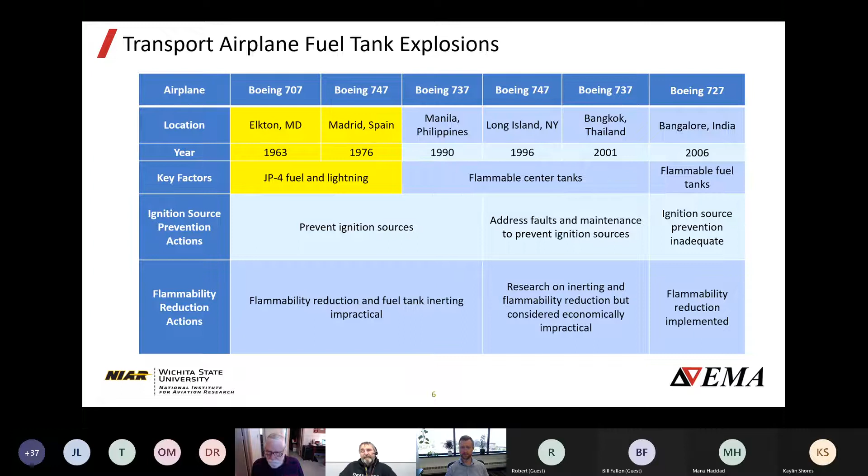So as a result of this, at the time, I was the chairman of the National Lightning Committee for the SAE AE-2, and we have a task group that is currently writing a document called ARP 6205. Now, as part of that research that was being done and to try to help industry, we came up with what we call a KART program.

Now, everyone always asks, what is KART? Well, in the state of Kansas, Wichita, Kansas is considered to be an aviation cluster. In other words, we have a lot of industries right around this area: Boeing, Airbus, Cessna, Textron, Beech, a lot of aircraft companies, and therefore a lot of support for those aircraft companies in Wichita. And Kansas is considered to be an aviation cluster.

Well, the state of Kansas helps support these companies, and they do that through a program known as KART, Kansas Aviation Research and Technology Growth. So every year, the taxpayers of Kansas provide these companies with seed money, which they must match and increase to develop programs to advance safety and to do research into various issues of aviation.

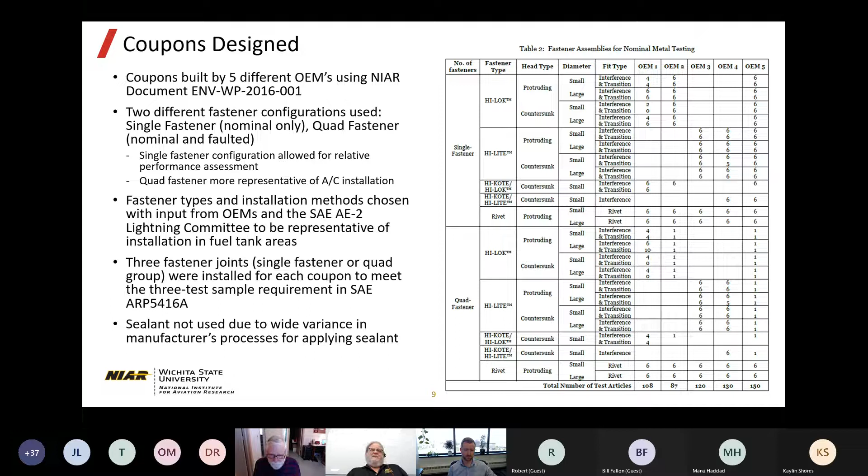The ones with the 4 fasteners, it was chosen that we would only have one of those have a fault installed because that was more representative of what you'd expect on an aircraft. It was low probability that you'd have a cluster of faulted rivets on an airplane, so we thought that was more representative.

A gap under the head is where, to facilitate that, shims were used in installation and then removed after installation, so you would get a characteristic gap under the head. The gap under the collar was similar, done with shims at installation to simulate that kind of fault. A scratch is a certain size, 5 thou wide, 5 thou deep, and 1/2 inch long scratch in the aluminum surface of the coupon underneath the fastener.

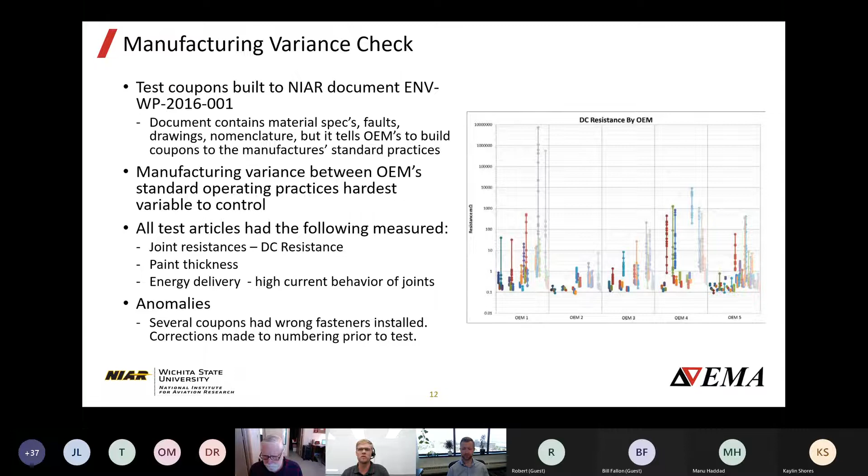So testing approach, we use the methods from SAE ARP 5416 and the waveforms from ARP 5412. This was basically a conducted current test using the component A 6.4 by 69 waveform. For our single fastener installs, which were the nominal installations, we typically started in the 5 to 10 kiloamp range. For the quad fasteners, those take quite a bit more current, so we had to go all the way up to about 100 kiloamps on that. Component B and C are direct effects waveform components. C is kind of like a continuing current component, and it's difficult to apply that in a scaled fashion.

So what we did for those two is we took the charge transfer from the scaled B and C and basically put that together as a lumped parameter and applied it as an exponential waveform. And that was basically scaled up and down. So it was only two waveforms applied. We applied those simultaneously, the A and the BC component. We use the camera method for everything. So basically what we do there is we take a digital camera and we use a camera verification to ensure that that digital camera can capture the light from a 200 microjoule spark.

200 microjoules is the minimum ignition energy for all the different components that make up typical aviation fuel. That's the standard for ignition source testing. You can either do it with a camera source or you can use that 200 microjoule source to calibrate a substitute ignitable mixture, like a hexane mixture or an ethylene mixture. In this case, the camera method is a little bit easier, especially since we're dealing with the same kind of coupon, same coupon size, fixed distance from the camera.

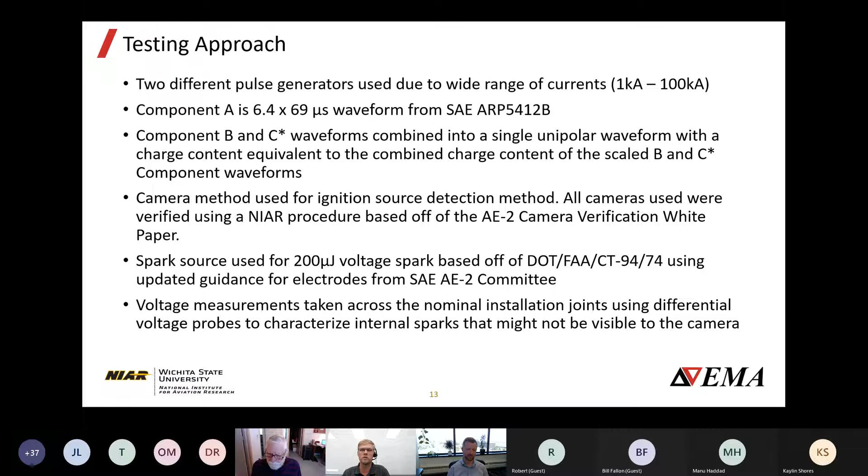The next slide, please.

So what we're looking for on these is, for the nominal fasteners, the minimum sparking threshold. So we want to find the minimum current value at which the nominal installation does not spark. So you have an installation guide. And then for the faulted fasteners, it's the maximum non-sparking threshold. For some of the fastener installations, we were able to go up to about 100 kiloamps, and that's more than enough, and that's where we drew the line. If it's past that, it's probably a pretty good installation.

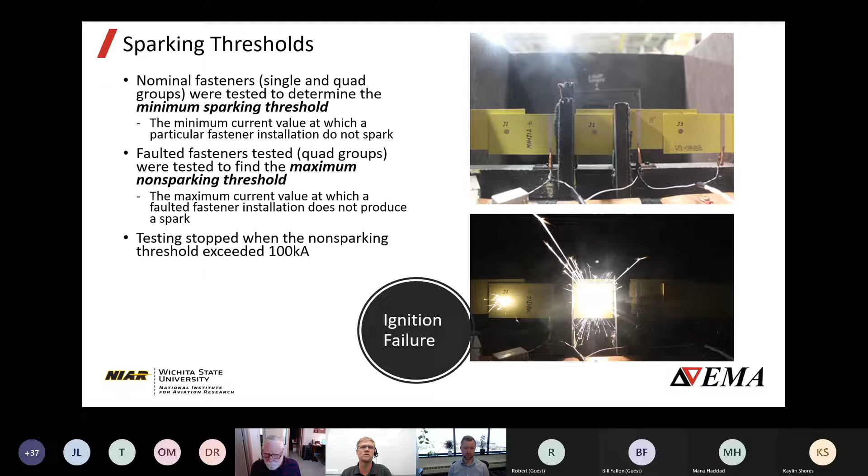So what we found: the majority of the sparks came from fasteners with non-conductive coating. Not surprisingly, riveted fasteners performed a lot better. Riveting causes the metal to expand and make contact with the edge, and if you don't have a gap and you've got good surface contact all the way around, no spark. Pre-test bonding resistance measurements had no correlation with sparking performance. So a key finding of this, and this should be known, is 2.5 milliohms is not a design target.

We did have some issues with the manufacturing anomalies that we discussed earlier. Had a couple oversized and elongated holes. We had a hole size that was too small for what the transition fastener fit was. Like I mentioned earlier, we were able to dissect all these coupons, and we did not allow any of the anomalies to skew our results. In some cases where we had wrong fastener installs or something like that, we could shift those results to another category. So we just had less data samples in one set and more data samples in another set.

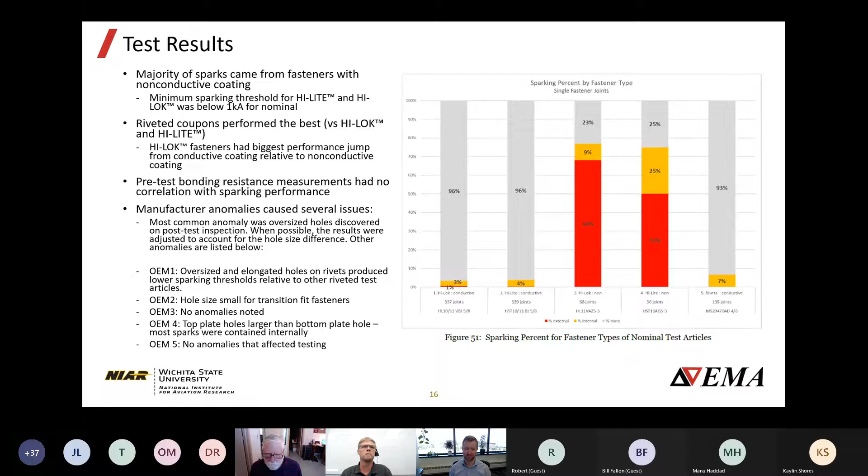Part of what we were looking for on this was to determine what factors had a great effect. As I mentioned earlier, obviously riveted fasteners provide the best performance. Fastener head type did not matter. The diameter of the fastener, surprisingly enough, did not produce significant results. The fit type, transition fit, caused more internal sparking, but minimal correlation to external sparking. The coating was a big driver. That was the most statistically significant driver in the reduction of sparking, using a conductive coating versus a non-conductive coating. Looking at the fault types, the burr and the gap under collar caused the most sparking relative to the rest of the fault types.

Obviously, more fasteners means you've got a better current distribution across the fasteners and less risk of sparking. And one of the also interesting findings of this is for our controlled manufacturing variance, which we can trace back to the manufacturers building the same coupons with their own processes, that did not impact the spark threshold, which is good news. The anomalies did cause some sparking. Most of it was internal, which would not be an ignition source by the test, but it is kind of worrisome from a design perspective.

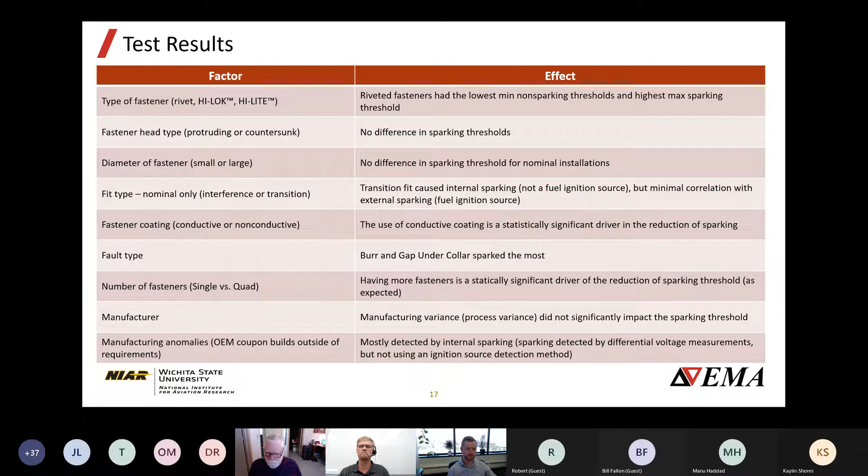And I believe that's the end of my slides, so thank you. All right. Thanks, Brock. So for the, Brock, can you mute your? Yes, working on that. A little bit of an echo. All right, that's great, thanks.

So the next part that I'll talk about, Billy mentioned in the opening that there's a simulation phase associated with this project. And the reason that we do simulation is part of the fuel system environment definition. And so what you have to do is you have to establish the current level, the amplitude and the waveform that could exist at every design interface within your fuel system that you will have to evaluate if ignition will occur or not. And this can be a major step in the 954 certification process.

And you have to do a grouping of your components based on fastener type, diameters, locations, whatever it might be, so that you can put these design features together in a way that you don't have to understand every current at every fastener within your fuel system. That's not practical to do. So the way you group these features together can matter a lot. And it can really help to reduce the number of measurement locations or simulation probe locations that you have to establish during your environment definition.

And within the guidance material 6205 that we're writing right now, that is very nearly finished, you can specify your lightning environment for your fuel system by testing, analysis, or similarity, or of course, some combination of those. And with discussions with NIAR and other programs that we've worked on for 981 and 954, really, we feel the best solution for setting your lightning environment is a combination of testing and simulation used harmoniously. And I'll talk about what that means and the selected demonstration approach for the KART project here.

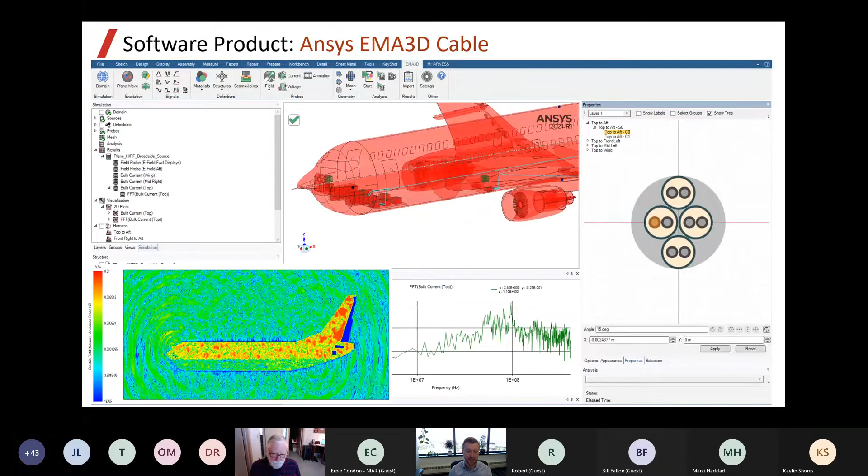For all of this analysis, we use our internally developed product, EMA3D Cable. It is a very mature software platform. It's well suited for lightning, HIRF, EMI, EMC interaction problems on aerospace vehicles. We have the ability to model full vehicles. We have the ability to model very fine details focused on small fuel system interfaces. We have the ability to model complex cable harnesses at the same time as our full aircraft. We have a transmission line solver integrated with our full wave 3D solver. And this is what we use for this analysis.

So when doing the lightning environment definition process, there are some key steps. First off, you have to establish a validation plan. What model and what test specimen do you have available to do analysis on? Do you have an entire aircraft that you're going to use for your environment specification? Do you have sub-assemblies of fuel system components? Do you have a wing that's available to do this assessment?

And as Billy mentioned, there was an aircraft that was donated and we were able to use as part of this evaluation for this KART program. And we took half of one side of the wing and we used it for resistance measurement, and we used the other side for a full wing lightning injection evaluation. And that's what's shown here, the one side of the wing that we rigged with an RCS and outfitted with probes so that we could do current measurements throughout the wing structures of this particular wing. An important thing to mention is that this aircraft had the fuel systems removed, and that would certainly be an important part of the process.

But since the KART program was focused on fastener interfaces for mostly structural components, we thought it was a good representation of what we were after as part of this program here. So once you have defined your aircraft specimen and the model that you will be using for your environment definition, you have to have some way of representing that geometry within your simulation.

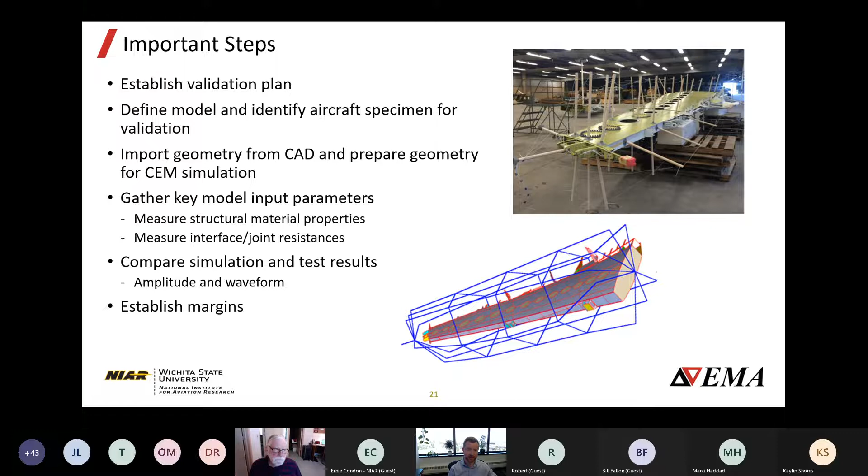And once you have built your model and performed simulations according to your attached-detached scenarios that are appropriate, you have to be able to compare your simulation and test results together. And that's both in terms of amplitude and waveform. And so once you have done all that, there's always the touchy subject of establishing margins. So I'll talk about each of these a little bit more that we utilized for this program.

So for the resistance measurements, what we did is, well, I shouldn't say, I didn't do this at all. I just kind of said, let's make some key measurements at these interface locations between ribs and skins, ribs and spars, skins and spars, and basically every structural type of representation we had within the wing. The NIAR folks did a great job of cutting samples from that opposite wing and then performing resistance measurements to gather inputs to improve the fidelity of the simulation model.

Now, Brock, one of his key points that he mentioned for establishing sparking thresholds was that the pre-test resistance had no correlation to occurrence of ignition event. But I can tell you for sure that the resistance does impact the current distribution. So whether or not it results in an ignition event, we can't say, and resistance may not strongly correlate to that, but it does have a big impact on the amplitude and wave shape of current distribution throughout the wing.

So it's very important to understand what kind of resistances and interfaces might exist within your fuel system when doing analysis. And so we collected a lot of data using these coupon samples at these primary structural interfaces and used those directly as inputs for our simulation model. And a lot of time was spent understanding the ranges and some sensitivity associated with those resistance values.

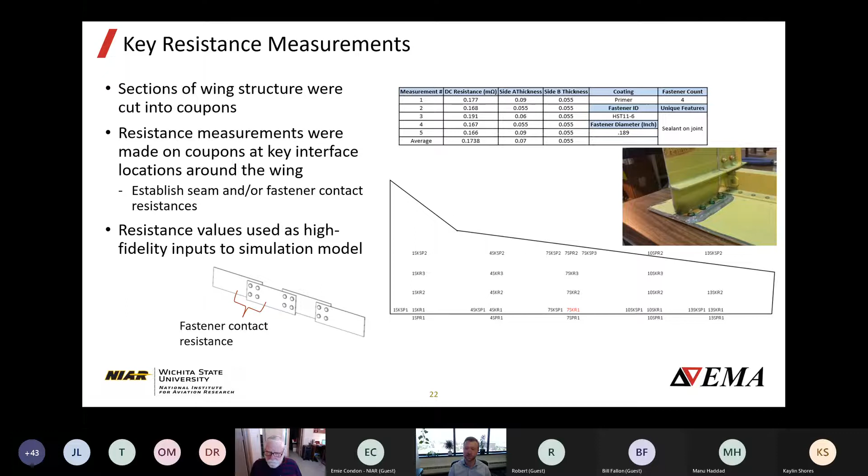For the actual testing, we created a test plan that utilized the entire wing. We measured magnetic fields with B-dot probes, both exterior and interior for structures. And then also we looked at currents on detach braids, main attached brackets, and an interior wire that we added that would be somewhat representative of the resistance of a fuel pipe or a hydraulic pipe inside the wing. So we had a test matrix that we looked at.

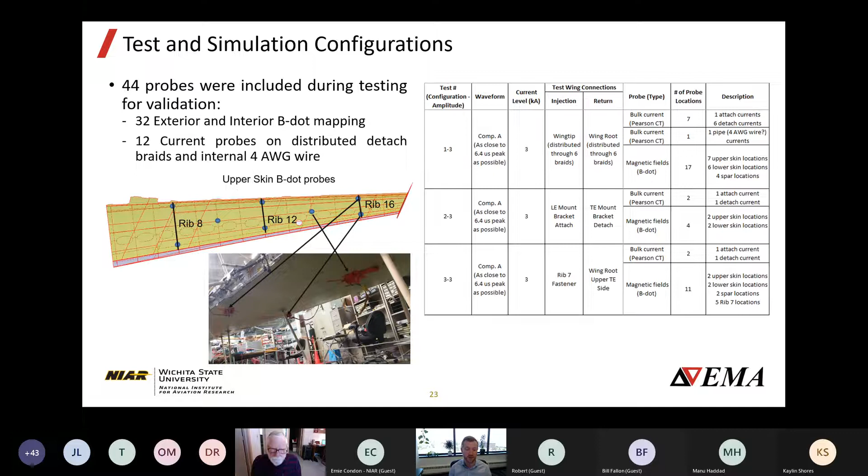One of the scenarios was a wingtip attachment and a root detachment or current exit. We also had a case where we did a fastener injection that would be representative of a 2A attachment zone. And we also did an attachment to one of the brackets on the leading edge and conducted current across the wing. For this particular wing, there's no engine mounted on the wing, but there are certainly scenarios where the engine design is such that it's mounted on the wing. And so we wanted to conduct current across one of the ribs for that particular type of design.

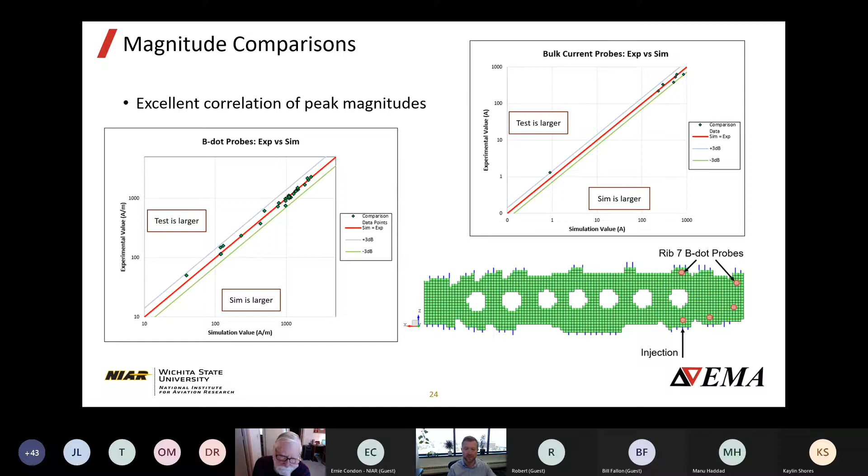And I say we were looking only at structural currents for this evaluation because that's all we had available within this particular test specimen. But it correlated well to the goal of this program, looking at structural interfaces with fastened joints. Here's some samples of the waveforms.

And so this is looking at magnetic fields outside on the wing, magnetic fields measured along ribs at interfaces between skin and spar or rib and skin, and then also some interior current locations. And so we have 44 different plots like this.

And if you're going through your certification program for 25.954, certainly you will be asked about peak magnitude establishment for your environment. And if you're doing a validation, that's a correlation between simulation and experiment like we showed on the previous slide. But you'll also be asked about the waveform. And that has to do with the action integral or energy content associated with the current flowing through a particular area. And there's different beliefs and philosophies about how you would do a validation or establish that particular level.

There's good information in ARP 5415B that talks about waveform reduction and how you should consider the different waveforms and do that evaluation. So I refer you to that for a deeper explanation. But what we're seeing in all of these results is a very close correlation between the test and simulation, both for amplitude and the general shape of when the peak time occurs and what the T2 is like for it.

Now, not all of the test results here have T2s. We didn't have the time to go back and do additional testing to carry them out for a long duration, but everything that we were able to acquire had a very good correlation.

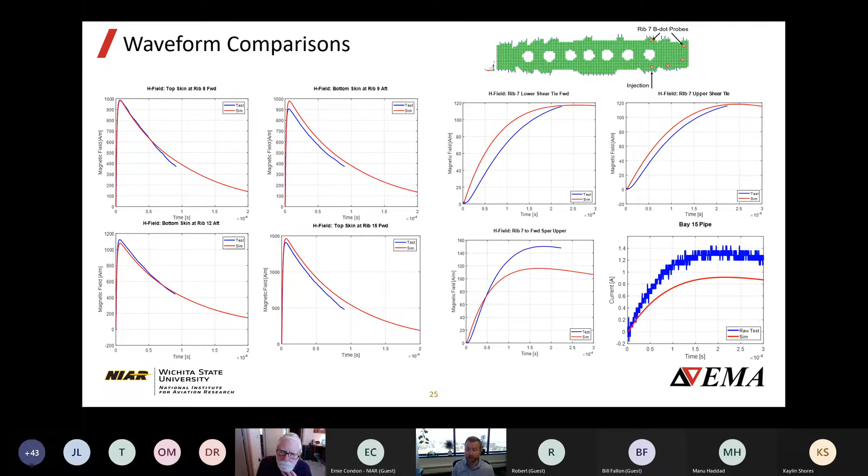One of the benefits of using simulation is that you have a more detailed mechanism for understanding current distribution within your fuel system. And this would apply for any area of the aircraft that you're doing evaluations. Within testing, you can accurately inject current, accurately include a probe for a particular area, but within the simulation, we can get a holistic view of how that current is behaving over the entire specimen that you're analyzing at all points in time, whatever you're specifying.

And so what I've shown here is some detailed current maps for ribs that have direct injection onto them. On the left-hand side, there's a current entry into the fastener. So this is our fastener strike scenario where current is being injected into the rib and fastener and skin all at the same time. And this is sort of an evolution in time with 6 microseconds, the peak double exponential time, being the top image, 30 microseconds for the middle image, and then 270 microseconds for the bottom.

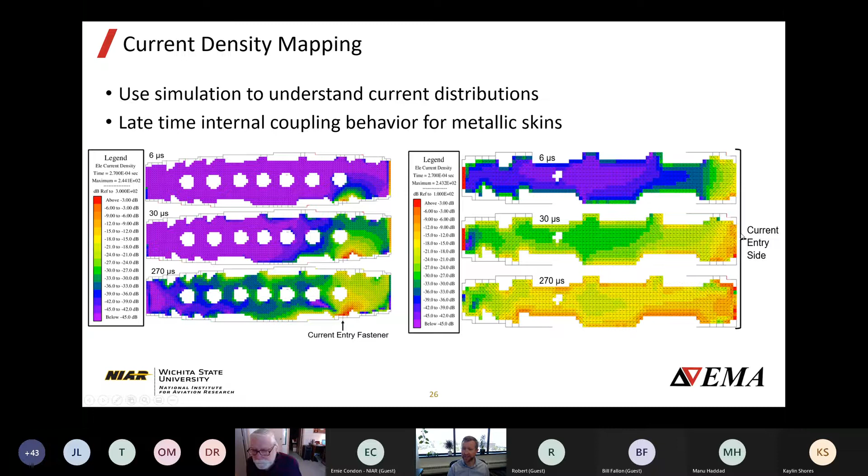And basically what this means is for metallic fuel structures, metallic skins of your aircraft, it takes a while for the energy to diffuse inside and really get to all of your components. And the one on the right-hand side here is when we had the current injection onto one of the brackets mounted to a rib on the leading edge.

And here's just another snapshot showing that current mapping along the rib. And within the simulation, you have the ability to map this profile, make an animation of it, or in a more detailed way, understand what your distributions are like throughout your entire rib.

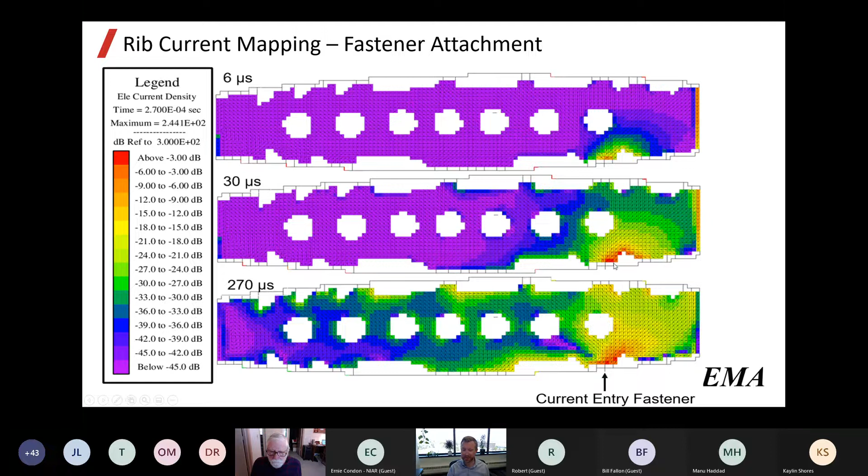Now, anybody who's done current injection onto a fastener knows that you may have current flowing down your struck fastener and then back up the neighboring fasteners. And that kind of behavior could be understood in a very detailed way within your simulation by doing this kind of analysis.

So in summary, the way we've approached this demonstration for the KART program is such that the data we have will be made publicly available, both from the testing and from the simulation standpoint at some time. And we feel that by using a test approach to understand current distributions on a wing structure, and then also simulations, this gives you by far the best understanding of what the fuel system lightning environment will be like when you have to go and establish your injection levels for your coupons. And so this is the recommended approach as far as we're concerned when you have to do this type of

evaluation. And some additional benefits of the simulation are that once you have a specimen available, you may have a limited amount of time or scope that specimen is available to do the testing. And if you have a simulation model to accompany that testing, you can fill in any gaps that may exist within the test capability. If you have an interface between a rib and a skin, it may be that you cannot insert a CT probe around that particular shear tie.

You may not be able to insert a Rogowski coil, or be able to analyze what a current is like at a particular location. And if you have a high confidence in your simulation model, you can use it to analyze places of the fuel system that you absolutely cannot achieve with testing alone. And so I think that's a huge benefit of the simulation.

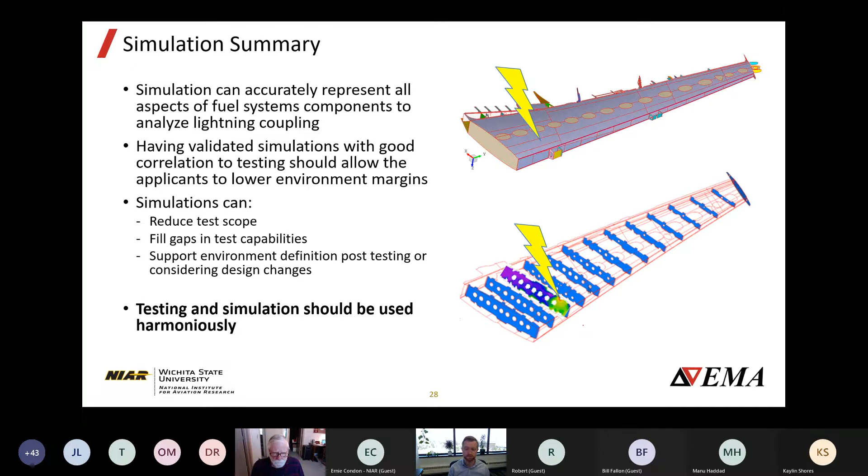And that's all I have to say about that. And I think I'll pass it back over to Billy now, and he'll give a summary of the work that's been performed and discussed today.

Yeah, well, thanks, Cody. I think that last point that you hit on was really important, is the ability that once you have the model developed, you're able to go back and make changes in simulation to see, well, what happens if I do this, or what happens if I do that, where you don't have to drag the test out there and keep doing that. The other thing, as I said earlier, it really did a tremendous amount for validation in my mind in regard to the modeling when you have really good data.

So people say, well, what use is this data? Well, the data is extremely useful overall, it shows you how the program flow should go to try to do this, because with 25.954 today, you cannot certify the airplane from a clean sheet standpoint without modeling. It is not possible to determine the current distributions around fasteners without the detailed modeling. So you cannot certify. Okay.

And that's a little bit different than what we've lived with lightning certifications in the past. Yes, modeling has been a very powerful and useful tool, but it hasn't been required. That is the difference with 25.954. Now, as we move to modifications, we move to doing STCs and things like that, I believe this data can be utilized to help supplement your analysis to where you wouldn't have to go run so many detailed tests, and maybe not any at all, depending upon the numbers.

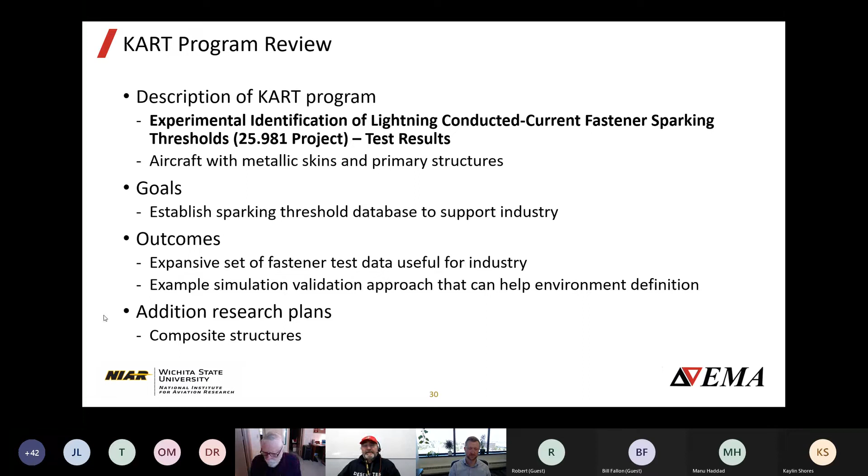So with that, I want to leave time to ask questions, but we do have plans to continue this. NIAR and EMA have a very long and fruitful relationship with one another, and we continue to build upon that. And I believe that if you have issues with this, NIAR in conjunction with EMA possibly could help you. So we're here, and that's really NIAR's mission, is to try to improve and work with industry. We're not a standard laboratory where you come and run a test and we give you the data. NIAR is here to help benefit industry.

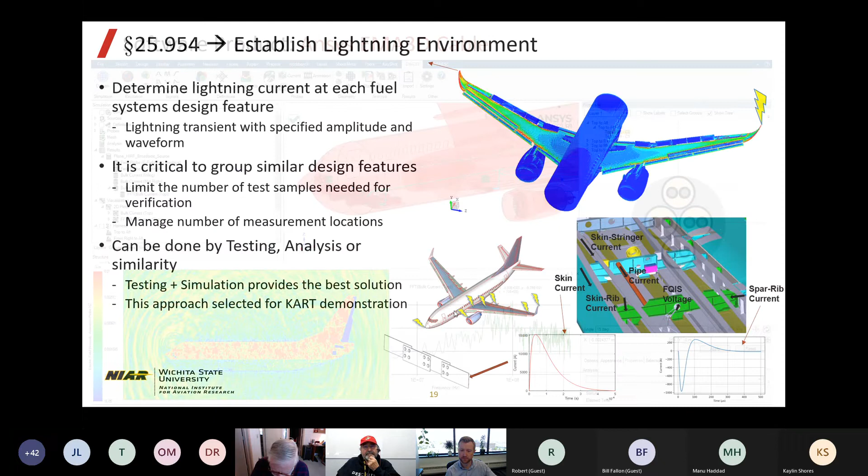All right, next question is, why are the coupons staggered the way they are? Okay, this is Ernie. I can answer that question. What we're testing here is the rivets, the fasteners. We wanted to eliminate any other possible interference with that. So what happens is sharp corners, like the corners of the coupons, and sometimes sharp edges, they like to arc and spark. So we staggered those coupons because if you line up a sharp corner with a sharp edge, there's a chance that it would spark instead of the fastener and interfere with our testing. So that's the reason we did that.

Yeah, and we're trying to ensure that the current goes through the fastener. So we're also using differential probes to look at that voltage drop between them. So in order to hook those together, as Ernie talked about, we have a faying surface there. So we're trying to connect, and we typically prevent contact. Those surfaces are coated, and so the only way current can go is through the material, is through the fastener.

All right, thank you. Next question is, how do you foresee this data being utilized in the future? So as I spoke about, we're attempting through the SAE Lightning Committee, there's an Aerospace Recommended Practice, ARP 6205, that is going through the process of approval within the SAE committee. It is hopeful that this data will be referenced within that document, and if it is, then it becomes public domain, and the utilization of that data for certification is accepted by the FAA.